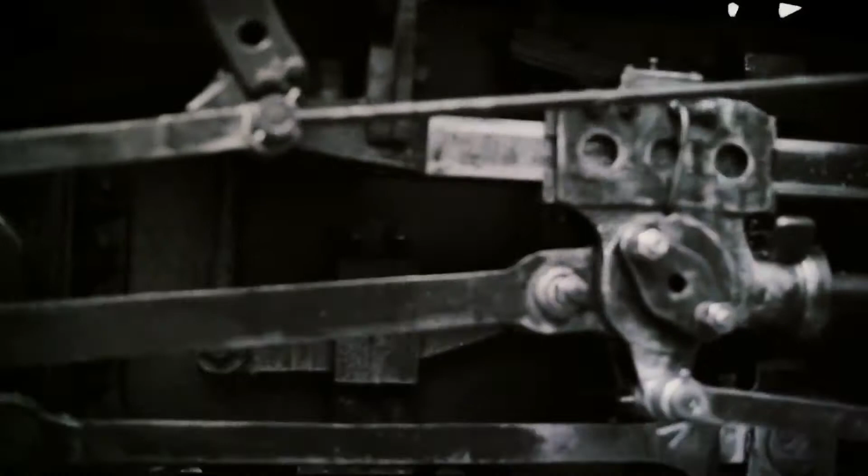The steam engine, perhaps the most significant invention of the Industrial Revolution, facilitated great improvements in mining, production, agriculture, and transport. Although several prominent figures from the 18th and 19th century are credited with inventing and improving the steam engine, steam-powered engines have a nearly 2,000-year history dating all the way back before the Industrial Revolution.

The earliest mention of a steam engine goes back to the 1st century AD, when Hero of Alexandria described the Eolipile for the first time.

More than 1,500 years later, Taqi al-Din in 1551 and Giovanni Branca in 1629 described simple forms of turbines powered by steam power, either a small steam jack or an escapement machine. They were mostly used by inventors to demonstrate the importance of steam power engineering.

Miners faced a major industrial challenge in the 1700s, due to the exploitation of water from deep mines. The real strength of steam was demonstrated at this time, when the energy was used to drain water from deep inside the mines. The potential strength of steam was realized as a result, leading to the development of a full-fledged steam engine. In the modern world, steam-powered electrical power plants were built later.

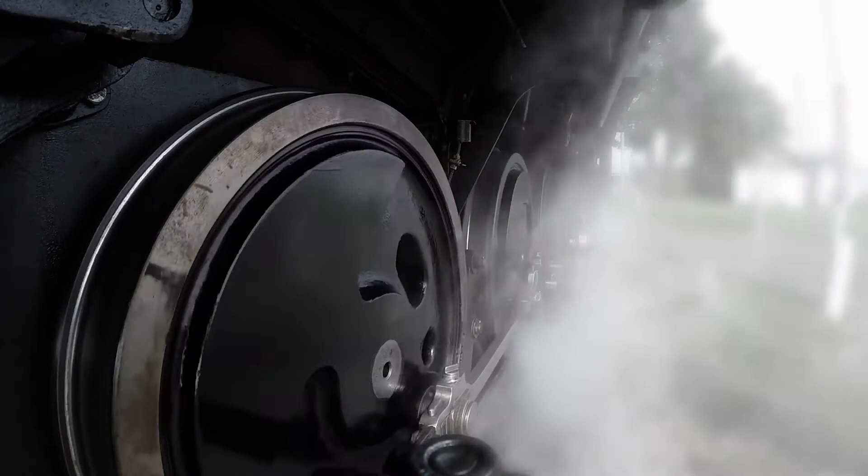Condensation of water vapor to create a vacuum was the fundamental concept behind the first steam engines. It would later rely on steam's increasing strength to push pistons in both directions.

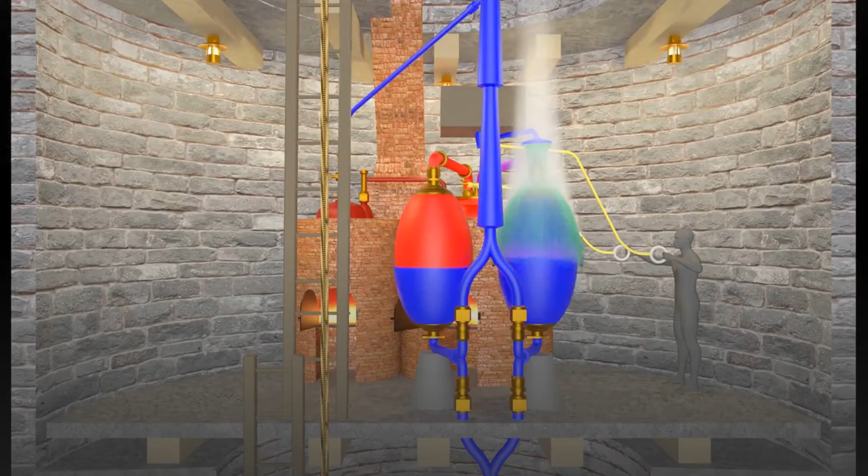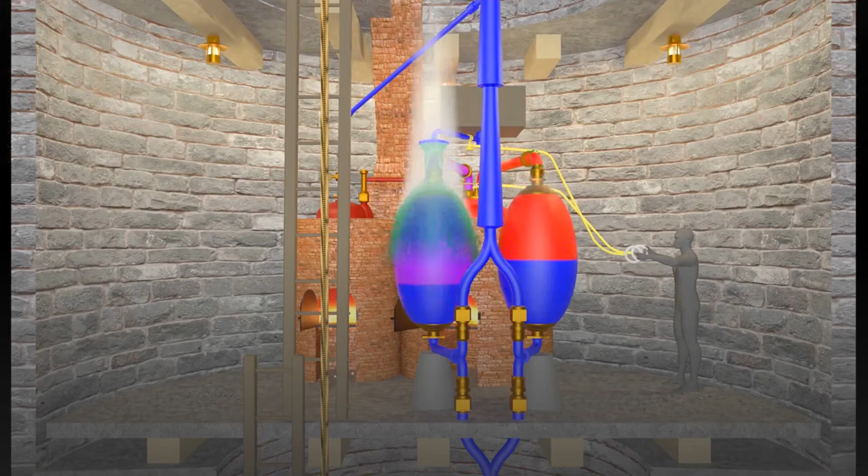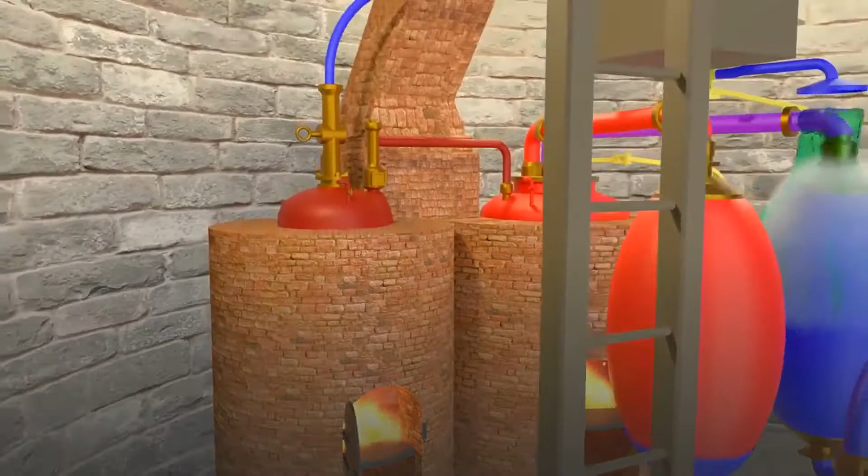This vacuum was used to provide enough energy to drain water out of the mines. This proved to be a temporary solution since the energy could only draw water from a few meters deep. Another disadvantage of this pump was that it used steam pressure to drain the water being drawn into the tank. The pressure was too high for the boilers, and many explosions happened as a result of the weak boilers.

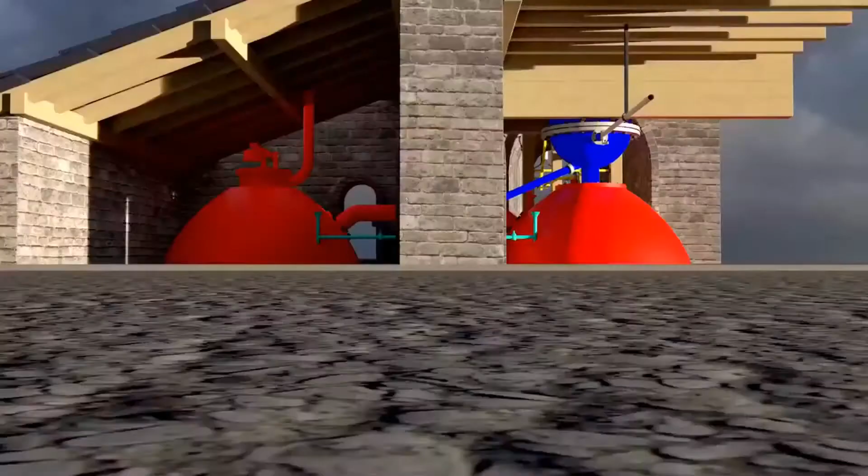Thomas Newcomen invented a practical and effective steam engine in 1712. A piston and cylinder arrangement were connected to a pump through a rocking beam in the steam engine he built.

The Newcomen atmospheric engine, like Savery's, used condensing steam in the cylinder to create a vacuum. The resulting pressure difference between the vacuum and the atmosphere was enough to force the piston into the cylinder and lift the pump. The piston would then be drawn back up in the cylinder by the weight of the pump.

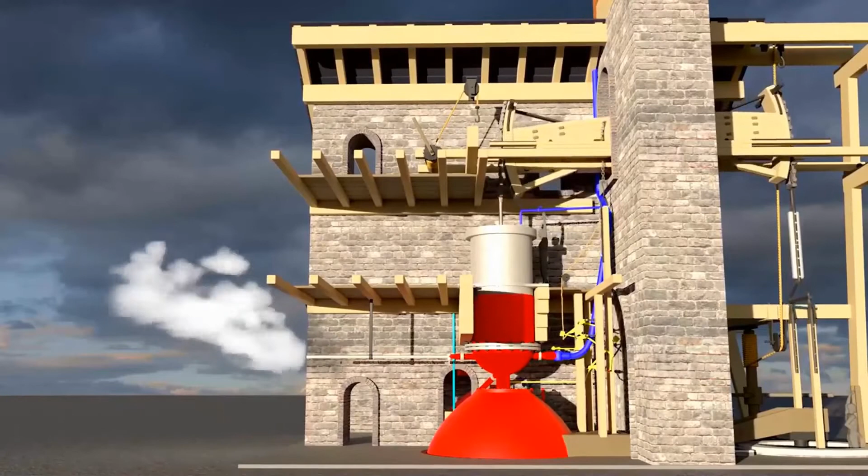A valve would open, releasing steam from a boiler. Another valve would then introduce condensing water into the cylinder and the vapor would condense again to water, repeating the cycle. For more than 50 years, the Newcomen beam engine was used as a pump for coal mines that would otherwise have flooded and been lost.

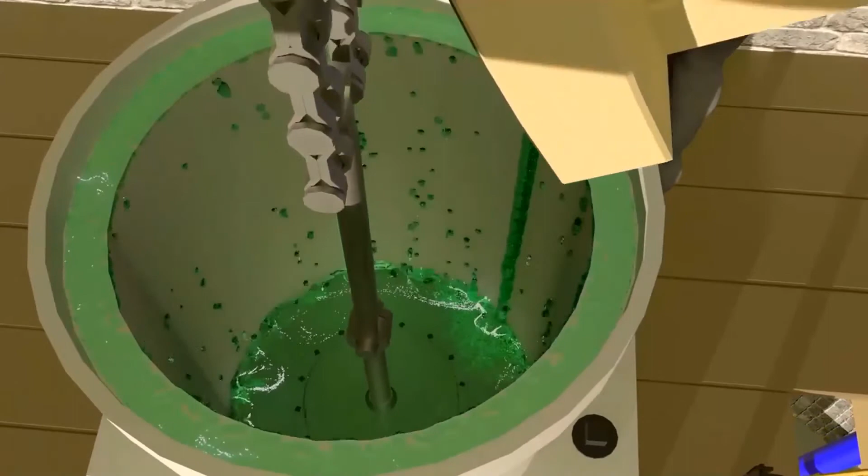They turned out to be inefficient since the engine took a lot of energy to operate properly. Every cycle required the cylinder to be heated and cooled, consuming most of its energy and resulting in significant waste.

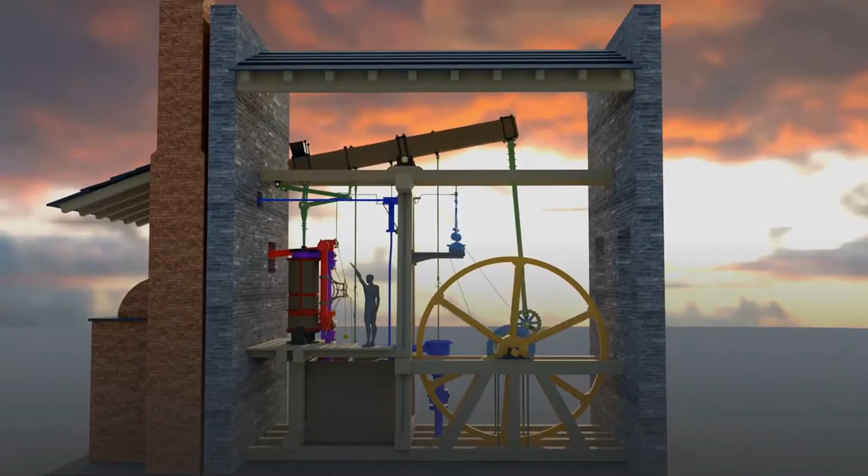Finally, James Watt revolutionized the steam engine by introducing a separate condenser into the system. In 1765, he created a separate condenser. Just 11 years later, the design had become a powerful steam engine.

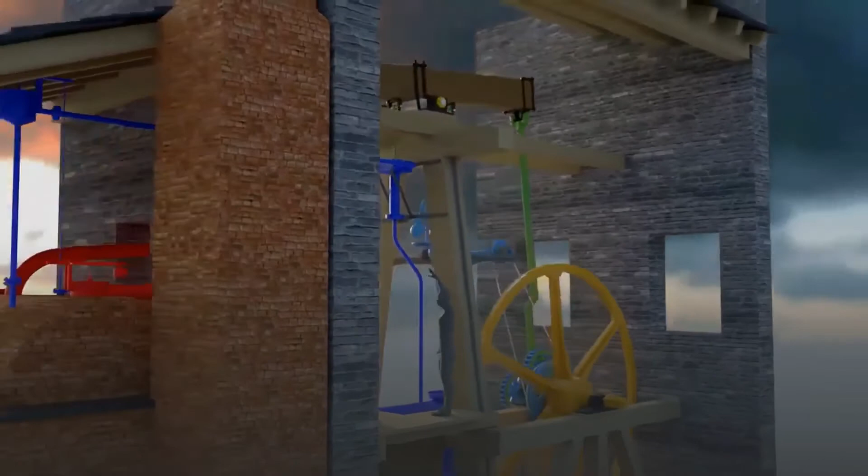The condenser prevented the cylinder and piston from being alternately heated and cooled, as in the Newcomen engine, resulting in a significant improvement in performance.

Boring of the large diameter cylinders used was one problem that's been fixed. John Wilkinson developed a boring tool that was held on both ends rather than cantilevered, allowing him to bore reliable cylinders up to 50 inches in diameter. As a result, the piston was properly sealed against the cylinder walls.

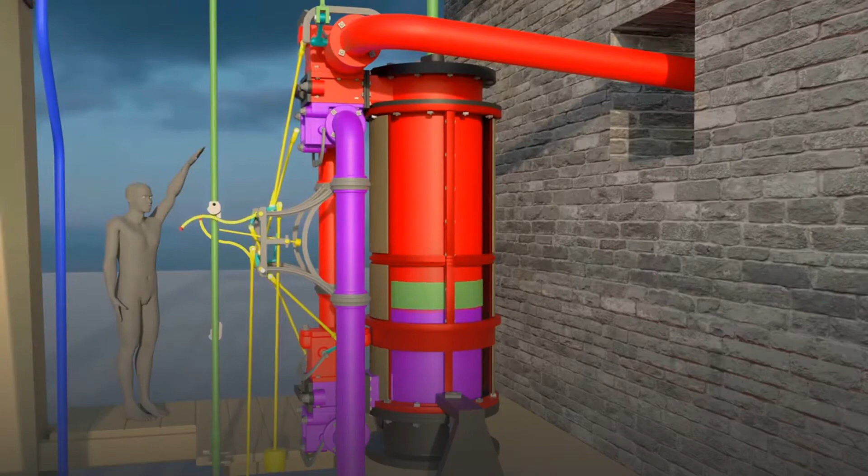Technology has improved significantly. Watt's engine was licensed based on the amount of fuel it saved. Jacketing the cylinder and developing a parallel linkage that enabled the piston to push and pull were two more developments. This would open the way for rotary motion, and the eventual replacement of water wheels as an industrial power source.

Watt considered high-pressure steam but discounted it because he believed that the boilers of the day were unable to manage those pressures. Watt also invented a method of measuring pressure versus volume in a cylinder, which resulted in the well-known PV diagram, which is still in use today.